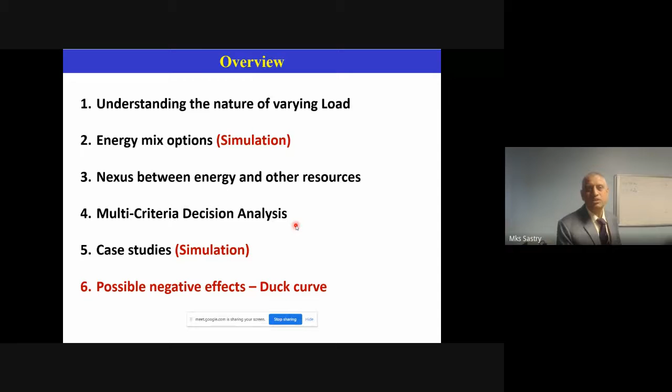Then there's multi-criteria decision analysis. This has been a fertile area - more than 3,000 papers have been published since the 1990s, and it is still a hot favorite for anyone who wants to publish. And then we will deal with two simple case studies.

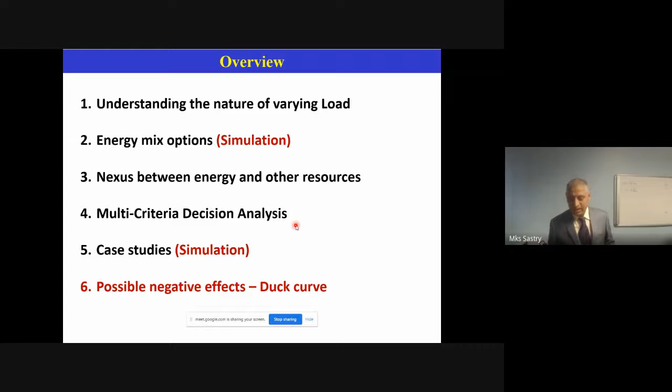First one is a simple smartphone application, which everybody can understand easily. The second one is the energy mix option directly. We will see which energy is the best and why. Then possible negative effects, what's called the duck curve, we will also see. So this lecture packs these things, and possible outcomes.

I know you're all teachers, not really students competing for a degree or sitting for a degree program. So research is very important. Professor Tomar sir actually mentioned that I'm more of a computer engineer.

Yes, I'm a consultant, more of a consultant. Much of my life is spent in engineering consultancy in databases. That's the reason I was lecturing in France on databases, information systems, business intelligence, and big data in medical sciences. These are the things I've worked on very actively. In India, I worked in India, Italy, and Canada. These are the countries where I worked on power engineering, power systems with databases.

But at the time, I didn't really pay attention. I'm telling you without any inhibition, I should have published more, actually, given my resources and the opportunities I had. My piece of advice is that one needs to do research. I'm able to deliver this lecture because I have done something.

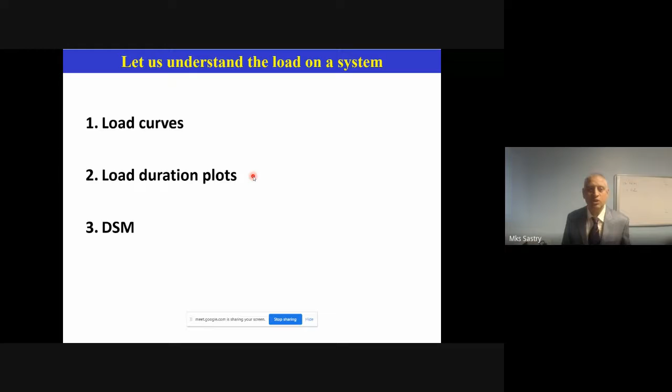So first of all, we need to understand load curves, then duration plots, and also demand side management. This is the first stage.

Those who know SCADA - our power systems are actually managed by SCADA. There will be different feeders in any city. Load data is gathered from each feeder for a 30-minute interval. This is the starting point. So there will be several feeders.

Within the feeder also, there will be lots of readings, because there will be points from the start of the feeder to the customer. We don't really consider all of those things. Even if you consider the start point of the feeder, there will be many points, because whether it is demand side management, load aggregation, or load measurement, all these things normally happen from feeder to feeder, because each feeder is different.

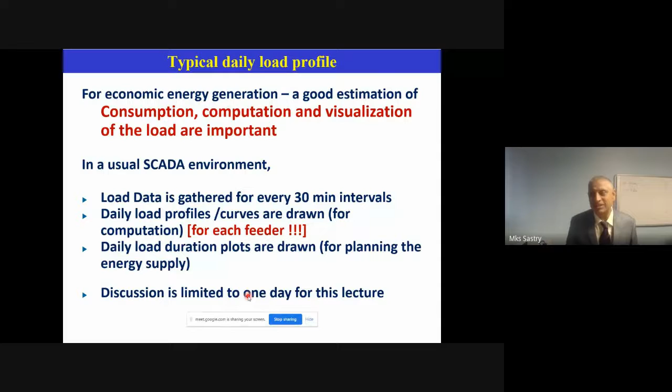Load duration plots are drawn. What are load duration plots? We will see, but we limit the discussion to one day, because it can be huge data. So welcome to the data and numbers - without data, without numbers, nothing happens. So this is what you see, the load curve. Let me explain quickly - this is not the actual load curve.

This is what you see in the books, but more or less it is the same thing. What is a good representation of a load curve? There is no single example, because load curve pattern depends upon place to place, socio-economic background and type of area—industrial customers, commercial customers, defense installations, government.

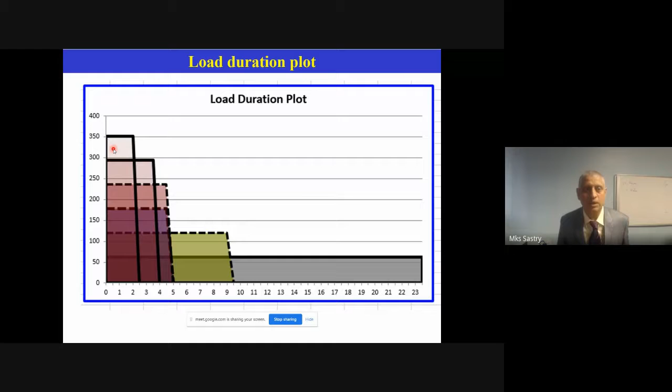This is the basic thing to start with, but this cannot be published. This is a simple thing, okay.

Now, typical daily profile: most industrial, let's say there's a colony kind of offices and a little small scale industry—the load curve will look like this. This I have taken from the internet, not really mine, but we have a full scale demonstration right in this lecture which we will see. So this is very important to understand.

We are trying to understand the nature of load profiles here. This one starts in the morning at 5 o'clock, going up, then taking it easy, and then after work hours, again peaks and goes down. This is most typical in US, India and China—developing and developed nations with a mix of residential and commercial society will follow this type of profile.

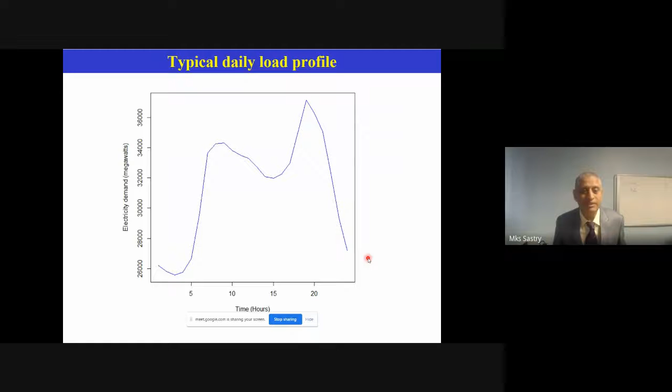So we need to design our energy mix options for these requirements—that is the fundamental proposition in this lecture. Okay, this is the load profile, fine, good. And with the energy mix, I don't want to go into the merits and demerits of renewable energies. It is simple—it is possible to integrate solar PV, wind, biomass and all that into the main power grid. This everybody knows, am I right?

Solar energy is typically only available during the day. If you don't understand this, there will be issues, because the lecture mainly depends upon this very fundamental fact: solar energy is typically available only during the day. And especially if you press solar energy here, because solar energy gets active around this time.

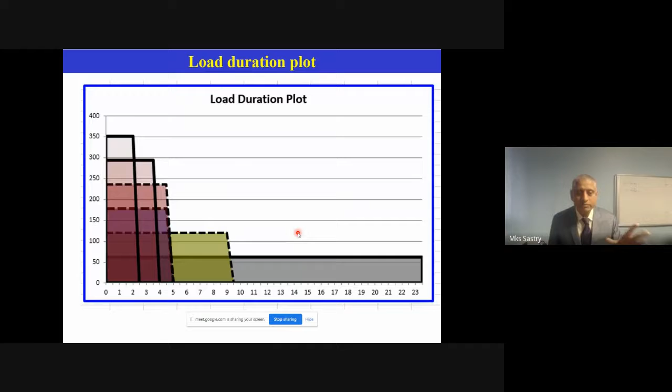Solar energy is a good example of peaking power. It can deliver the peaking punch if it has the capacity. Once we know the capacity, we can actually plan a solar PV plant to meet the peak part of the load. That is one option if we have the land, because solar panels require a lot of land, you can't put them just anywhere.

Wind is available throughout 24 hours, albeit with randomness due to varying local wind speeds. Unfortunately, in city areas you cannot put wind plants. They will be very far, and a lot of losses will occur if you transport power from long distances. Still, that is an option, but the problem with wind is the randomness. We won't go into the details, since wind is also an option which I didn't treat in this particular course, because I don't want to increase the scope. When you mix wind into the energy mix, it becomes a cocktail.

It is also possible to add local energy production, which is very important. That part is called DSM. What is this local energy production? Smart cities will have some consumers draw power from geothermal sources.

Some consumers may have rooftop solar PV, which is well known, 1 kilowatt, 2 kilowatt, 3 kilowatt, up to 5 kilowatt. These are the configurations. Kilowatt peak means peak capacity, peak rating actually, we say KWP rating. 1 to 5 is very common in India, elsewhere it is the standard. Some people may have beyond that.

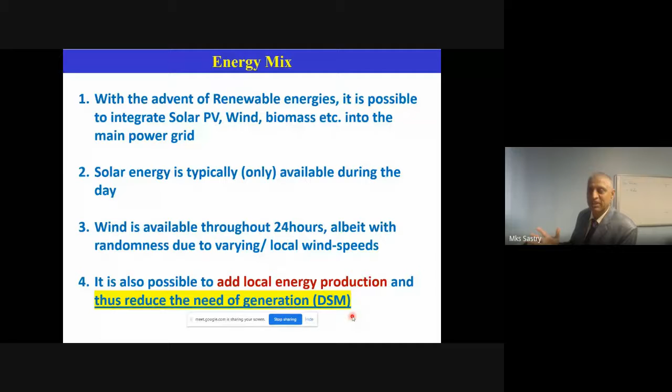If you do not know these things, you produce more energy obviously, and excess energy. If there is no demand, you have to curtail your production, which is called energy curtailment. It is not load shedding, it is the curtailment. So these are the points that we would like to take forward.

Now let us look at demand side management. Engineers are worried about the peak load, which exists roughly from 9 to 5. This part of the load causes a lot of stress: thermal stress, electrical stress, and heat stress.

All the things will happen on the system, insulators to transmission systems to apparatus, everything will be heated up. It is better we reduce the peak. That is a known aspect.

And how do you reduce? There are two methods, normally different methods of course. One is increase tariffs for peak hours. This is what is done in India, throughout the world, not just in India, everywhere. So if you are consuming power here, you pay more.

Now the first question, sir, we are not paying like that. We pay the bill on a telescopic basis. In India, telescopic billing system is used: up to these many units, this much, if you go beyond that units, this is the charge and all that. That is the telescopic billing. Billing part is very important, but we don't take up that in this lecture because it is too vast. Now, we don't do that.

Yes, domestic consumers do not use the time of use tariff. If you are in a home, we just pay as per the number of units and that is it. But if you have a shop, if you have an industry, like commercial and industrial customers, they pay according to the time of use.

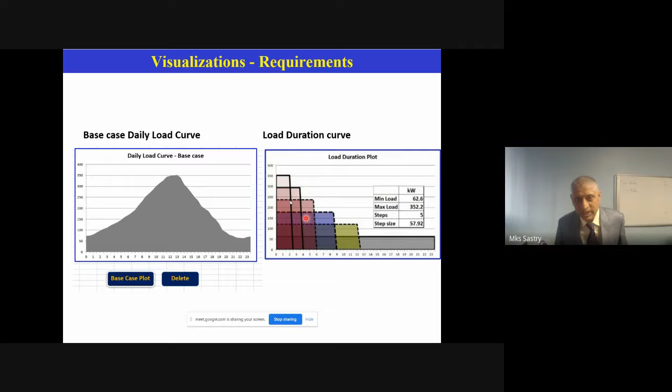If you connect all these points like this, you get a curve. You don't get these rectangles and all that. So it depends. These are the peak shapes, and this is how the visualization should be for a load.

And we just have seen the peak shaving. My dear participants, please pay attention. This is what we call peak shaving if you just avoid this peak load somehow, which is causing a lot of stress. Here what we did is avoid this darker part.

How do you avoid it? You can shed the load, cut it off bluntly, or apply switching off, but this does not happen in reality. The smooth shaving is not possible because you cannot switch off sections so that the load is represented like a smooth curve here. That is not possible.

Unfortunately, all research papers show it like this. This is wrong. Why? We will see.

Let's say you are subtracting 100 from each point. This is 350, this is about 250, and this is 100. If you subtract 100 here, you have to subtract 100 from every point. It will go down, so it will do a zigzag pattern, which we'll see.

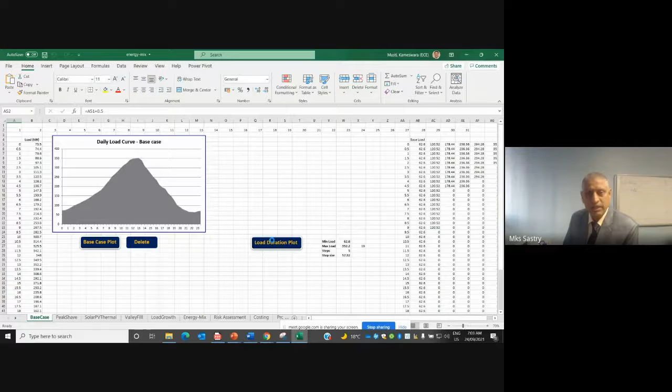Purpose of this is visualization. Those who are into computer science will appreciate visualization - this is very important. This plot is for load, and this plot is for the load duration plot.

This has a different purpose. Now peak shaving - this is what peak shaving is. Same data, let me delete the plot. My PowerPoint discussed different things like this.

But the question is, do we have a tool so that we can simulate whatever I talked about so far? That is what this attempt is. So base case plot - this is the base case plot. And I want to do the peak shave, and the peak shave is 100 here.

And look at this. If I subtract 100 from each point, it will come like this. But if you want it smooth, cap the peak. Capping the peak is different, and shaving the peak is different.

If you want to cap at 250, let us do the plot. I want to cap using this button. If I use this cap or peak button...

So it is now capping at 250. But strictly, this is not possible unless you have a constant single load and you're switching it off. Even then, there will be other loads on the system, so this kind of smoothness is not possible anywhere. These things really happen only in papers and textbooks.

So this is a kind of simulation. If you subtract more, I am putting 200 here, and now I am doing the peak shave. Earlier this was 100, now I changed it to 200. If I click this, it will go down further. Look at this.

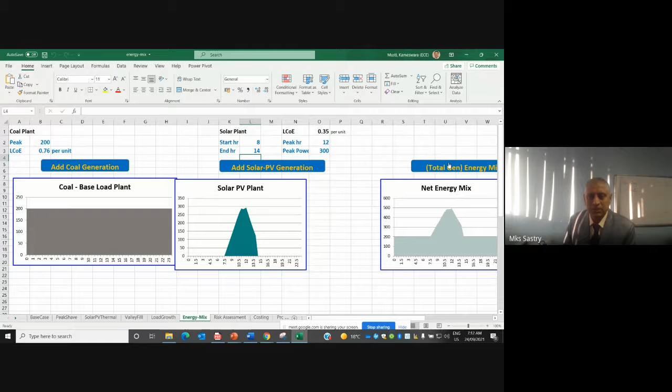So if you add these two plants, how does the energy look? This will be your new energy. This base plant, the coal plant, is providing 200 megawatts like this, and now we have a solar plant that adds on top of it - this is how it looks basically.

This is what we call energy mix. I just want to show why we add solar PV - because solar PV is best in its segment to meet the peak load. If this solar guy is not there, what happens?

If solar is not there and you have to meet the entire load, this guy should go up to 250 or whatever - it will be a full block of rectangle, while the load is like a curve. So there will be a lot of load issues. If you produce up to 500 megawatts coal, this region and this region, the energy has to be curtailed because it cannot be utilized. It will be wasted because you are curtailing the energy from the coal-based plant. That is uneconomical, but you cannot avoid everything.

Let us say you have 100 megawatts of load demand.

You need to put at least 130 megawatts of capacity because there will be lots of losses and all that. Minimum 130 megawatts generation must be there. So this is the ballpark figure, kind of 30%. Though people say 15%, but 30% is the reality. So with this, we stop and go back to the lecture, where we demonstrated both of them.

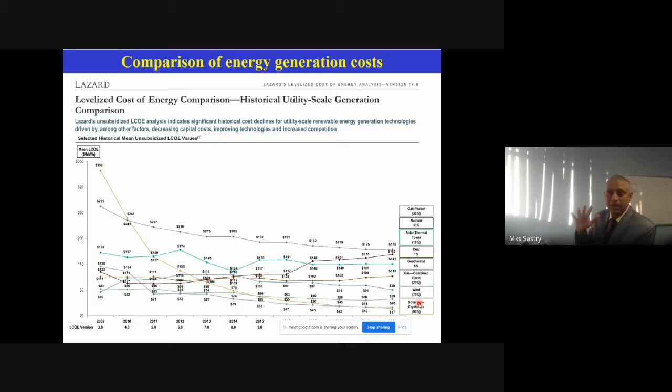But the story doesn't end there. This is one reason why we are producing more solar power, and there's nothing wrong in it. This is very clean power and does not pollute the environment. Most people do not understand environmental pollution challenges - it is a deadly menace. India and the world, Americans and everyone, are victims because of cancers and lifestyle diseases from this. It is well proven that wherever you use energy from environmentally friendly resources, the general health is much better.

So you cannot compare the costs just like that. This table, again from Lazard on the internet, shows solar PV compared to conventional energy. Each energy comes with a condition - for example, solar PV is available only during parts of the day, generally for 5 hours, as everybody knows. It is peaking, but it is intermittent.

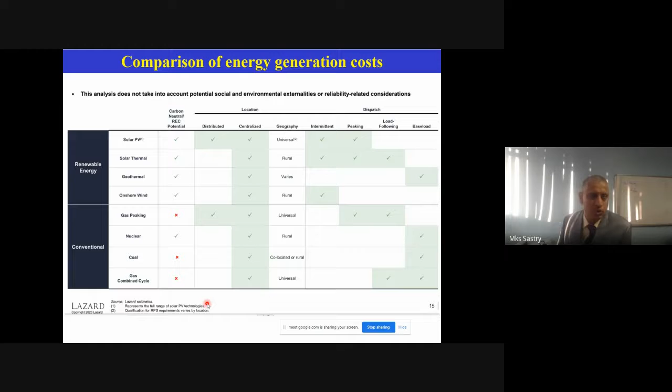Gas peakers are also a kind of load following - yes, it is load following. Solar PV is not load following. It follows the load only during peak hours, but after that it cannot, because it doesn't exist. That is the problem - we need load following energy resources, and only an energy mix makes that possible. That is why this lecture, the concept of energy mix, is very important. Each energy comes with its own conditions, disadvantages and advantages.

Now there is a nexus between water, food and energy. People should understand this point, which is mostly ignored in research. Well, research is there, but normally in university situations, or general talks, TV shows or whatever, they forget the nexus and just say solar, wind, biomass and all that. It is not like that - one needs to understand there is a nexus.

Nothing is free. If you want energy, you need to spend water. And if you want food, you need to spend energy. For food, you need water, because if you don't plant the plants and supply water, you don't get food. Do you want water transported to your apartment? You need energy - water does not come to your doorstep unless you transport and purify it. These are all energy intensive applications. So these three - water, food, energy - are not complete on their own; they don't represent the full picture.

Now let us look at infrastructure and finances. A water purification plant is very large - huge apparatus, and a lot of electricity is used there. For finances, most projects typically start and consume money over 10 years - 5 to 10 years is common. Even solar PV plants require spending for the first 3-4 years before returns come, and there are lots of issues. You need a lot of land, and it has significant impact on environment and national security.

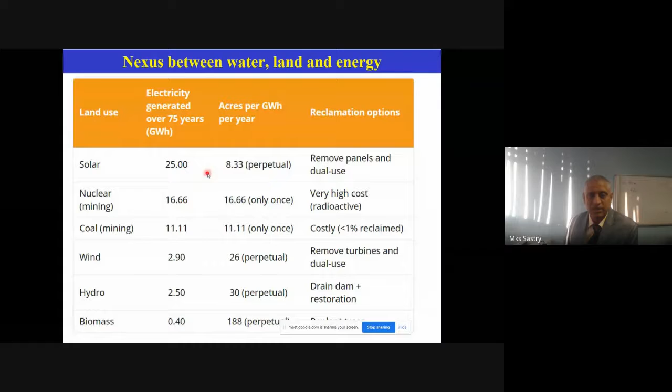Okay, and now the land. This is taken from another resource, not the best example, but these guys use it in a different context - this is the American context. Acres per gigawatt hour per year. So solar requires about 8.33 acres per gigawatt hour. These are the units, gigawatt hours. This is perpetual, meaning forever - the moment you put a solar plant, you can't really do much with that land.

Wind, you need more land. Most people think that with wind, you don't have to put anything - no, that is wrong, we have to put a lot of land for wind. Then hydro, it takes a lot of time. Biomass, you need a lot of land. So some countries have the land, some countries do not. For example, especially small islands, they will not be able to afford these cleaner technologies, and that is the point. So you can understand, this also shows some kind of nexus and numbers.

Let's move on. Now, coming to the literature, I'd like to spend some time here. There are different issues because each is interlocked with each, and we are now talking about energy mix. So how do you prioritize? Without mincing my words, we call this approach MCDA, multi-criteria decision analysis. It is very popular, and it is the only way to do it in the best possible way. Here, renewable energy problems - it is well done, not just renewable energy.

If you are a civil engineer or mechanical engineer, there are lots of papers published in MCDA - more than 3,000 papers - with applications to different fields of engineering, including tertiary education. In the education field also, MCDA is applied to support decision making processes.

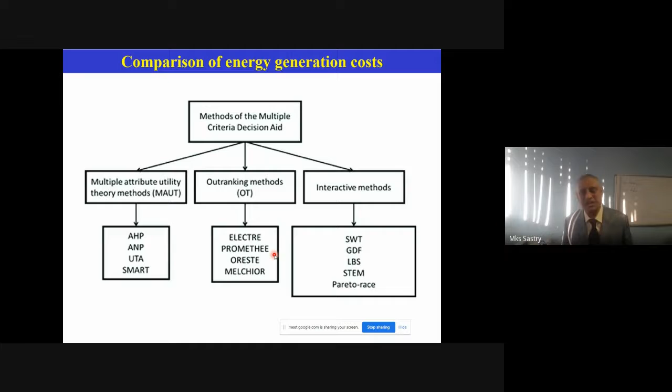Coming to MCDA, there are lots of methods - you see AHP, so many methods, outranking methods, interactive methods and all that. There are more than 200 methods, which means there is a lot of scope, and you need to read a bit and program some of the methods and compare them with each other. A lot of papers are published in this area, and there is significant interest from policy decision makers.

Now, when you do this evolving decision-making process - actually ignore the title, it's wrong here - let us say you are in a situation where you have too many parameters and you can't decide whether to include or exclude some of them. Some of them are detailed, some may be vague, certain or uncertain, just like different parameters without a single unit of measurement.

Consensus is fragmented, iterative, rigid, unstructured, and so on. Then you need to do risk analysis, modeling or monitoring, cost benefits, and stakeholder opinion. This is very important—stakeholder opinion matters a lot. Opinions are important because we are humans, and we will see why.

So, decision makers—this is a kind of infographic. If you have this type of situation, then MCDA works better. Let me give a simple example.

Let's say your younger sister—you know what is meant by younger sister, she's neither fully grown nor too naive—wants to buy a smartphone and wants you to assist her. That's the example. Now what do you do with that? How do you go about it? She knows certain things and doesn't know certain things. That's the best example, and we resolve that too.

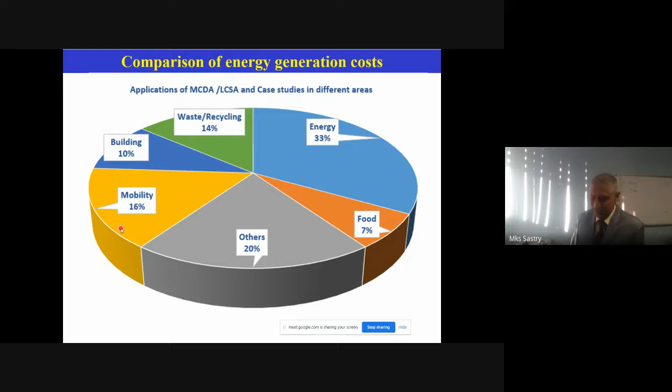And in energy systems, for sustainability studies, SWOT analysis, barriers, and selection of typical sources—this is the point for energy mix. A lot of work has been done in this, and we also do one example in this lecture.

So, MCDA present proposition: researchers and policy makers have significant interest in this—nobody can deny that. MS Excel is being used as a platform, but tools are not available in the public domain. That is the problem. My tool is one of those, but it's not fully developed—it's an example. I wouldn't beat my own example down, but it is what it is.

Application of MCDM in energy studies is of significant interest to many, especially energy studies. At present, there is no single software tool that can apply different MCDM methods—multi-criteria decision methods and analysis. There is an immense need to develop such a software tool to assist researchers, and that is the motive behind this MS Excel tool.

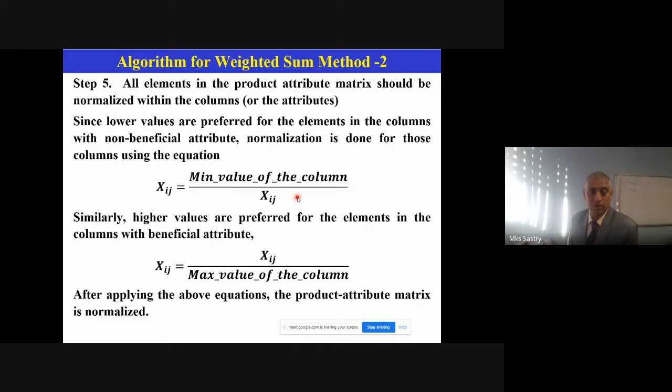These are ridiculously simple, very simple arithmetic, no calculus involved, and you can do wonders with this. You can use MS Excel straight away and do the things. But look at my Excel and try to do a similar approach.

Now let us look at the smartphones example. I did not put the brands here, but I have taken 5 mobiles, and the price is about 1250, 850, 1400. These are not really Indian rupees, I have taken some currency - this is from Trinidad and Tobago, where I worked earlier.

There are 5 products, I put 5 here. Beneficial, non-beneficial - price is non-beneficial. Storage, more storage is good, so it's beneficial, I put 1. Camera, more pixels is beneficial, 1. If it is non-beneficial, we give 0. Appearance - well, I don't know what appearance really is, but more beautiful is probably more beneficial, so I give it 1. Weight, we already discussed, is non-beneficial.

So these are the actual prices, these are the storage in GBs, these are the camera pixels in megapixels. Appearance - this is what you need to understand, please pay attention.

For appearance, what we do is basically ask, on a scale of 1 to 5 - for this you give 5, for this you give 2, for this you give 1. These two are the same, you give the same number, something like that. For example, this one and this one look the same to me, so I give this - this is my opinion as a buyer.

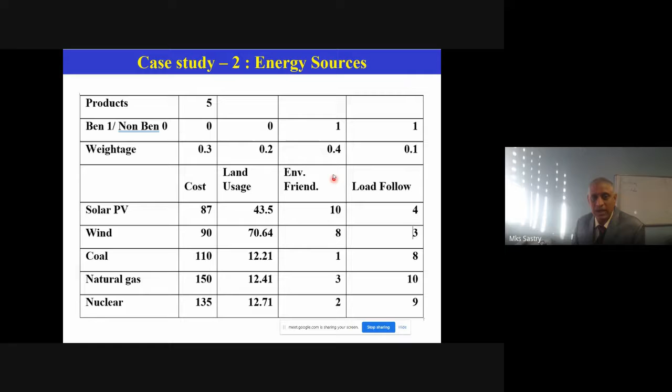So all the methods ranked solar PV as the winner because it is the most environmental friendly one, and this category has 0.4 weightage and all that. So these are some of the things, it's kind of regular math and all that.

And TOPSIS doesn't really give that. If you see, TOPSIS has the first 2 okay, but the next ones are kind of crisscrossed and all that. But to tell you, this is a kind of benign example. If you challenge it with complex data that are very close to each other, TOPSIS certainly gives different, probably the best solutions and all that. One needs to get into this computation, then they will understand. This is because TOPSIS uses what is called Euclidean distance.

Okay, now let us simulate this one quickly. I know I'm coming to the end of the hour. Don't worry, I will finish on time.

If you have 5, you can fill this, whether it's purple or light red or whatever. You can use all these columns as attributes, and you can add more energies here, whether you apply for smartphones or whatever you apply. Let us say you want to do smartphones, just click here. This tool comes with built-in data so that you don't break your head and all that. So if you click here, the data will be loaded automatically from here.

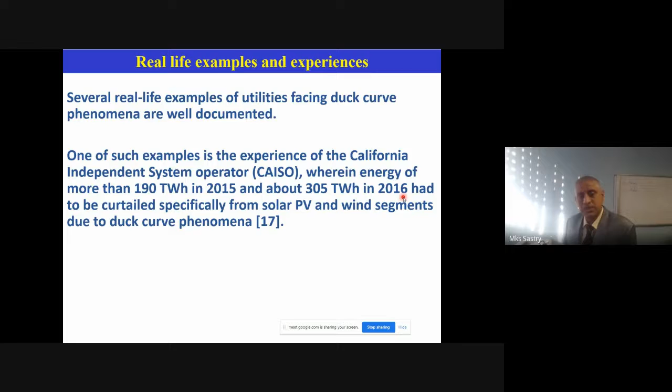What happened in California, especially, is a well-documented experience. Many countries are suffering with this right now. I'm not against solar PV, but you need to have the quantification properly. Solar PV is the best for the world, but we need to have it right.

So what happened due to the duck curve phenomenon: from around 4 p.m. to the second peak which occurs about 8 o'clock, they needed about 3 hours to ramp up 13,000 megawatts. That is significant stress on coal plants, because solar ends around 5 o'clock.

Now the load is going up, so solar is not available. You need to put other energy into service, and solar and the coal plant cannot just come in-you can't switch them on just like that. So throughout the day, the plant must be switched on, whether people use it or not. That is the alternate solution.

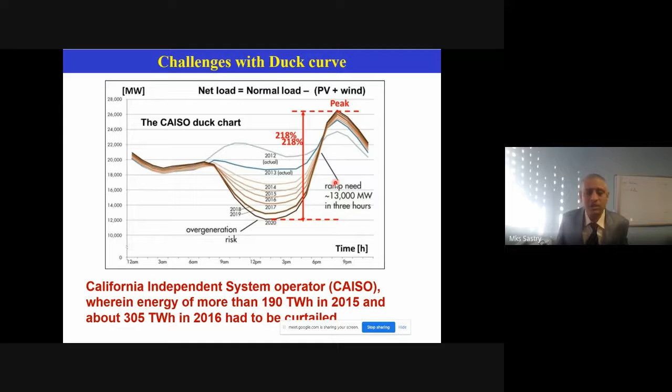This problem is known as the duck curve, because it looks like a duck. You can go to IEEE Xplore, there are papers published on this. This is a negative effect, so don't think that you do MCDA once, rank solar energy high, take proportions, and that's it-there is a way to deal with this. Regarding quantification of the energy mix, I did not actually explain the proportions because I want to publish it, but you can make it out naturally.

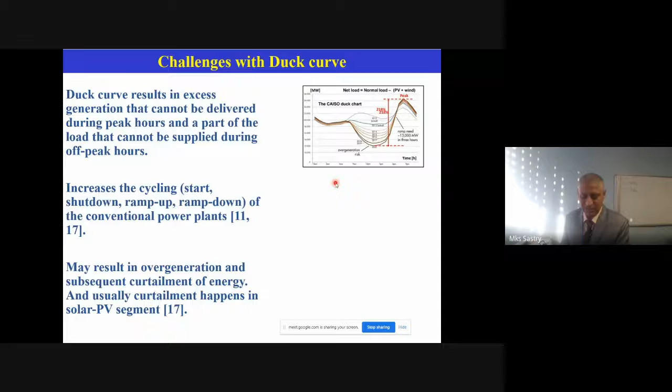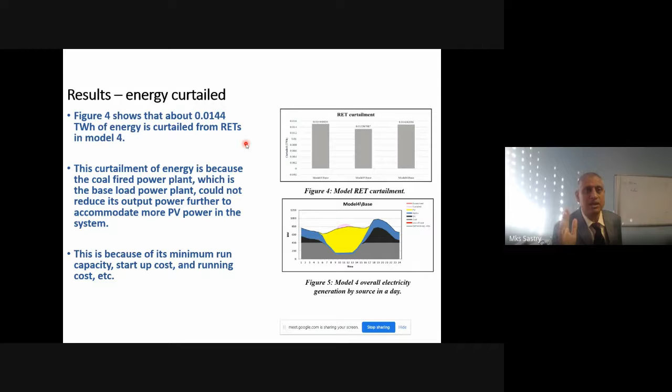So these are the results and plots. There are solutions-energy curtailment, for example. Energy curtailment cannot be avoided; we have to curtail. Unfortunately, energy is curtailed, but in a good sense. If somebody has financial sense, they will curtail solar PV, not the coal plant. You need to find the reasons.

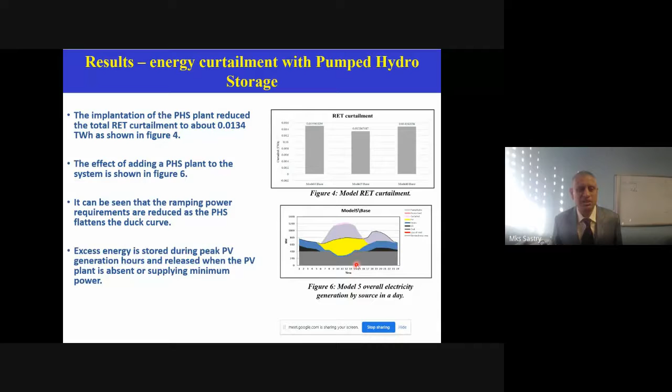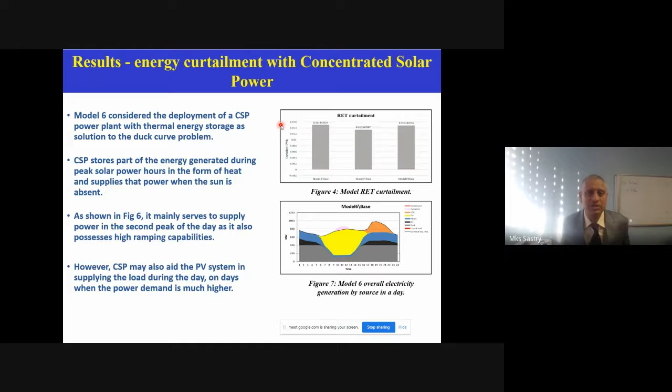It can be offset with pumped hydro. The simulations are there, but I don't want to go into the details because the lecture itself is on MCDA. There's also energy curtailment with concentrated solar power-there are one or two plants coming in India, but this is not yet popular, and there are environmental issues even with CSP.

Conclusion: MCDA can be used for solving the energy mix problem. Software needs to be developed-an MS Excel tool can be used, but you can use other tools also. The areas of MCDA, energy mix, and the duck curve are of significant interest to contemporary researchers. With this, I end. I hope I brought something of interest to the floor. I end, and over to you.

Thank you, Dr. Sastry. If there is any question, it's open to you. Any participant, if you have any question, can ask-feel free, because this is not an exact science. MCDA is exact science, but the solutions will differ. Any sort of discussion, I would be happy, and I will be able to answer.

Any questions from the participants? I think it goes on in broadcast mode only. Participants either have more knowledge or they have understood nothing-that's only two ways. Otherwise, there must be some question if you have gone through a different topic.

Yeah, I am seeing the chat here. I don't know if participants have any queries-they can also message in the chat box. I would appreciate that. They are more conscious of the attendance link, asking about that rather than questions.